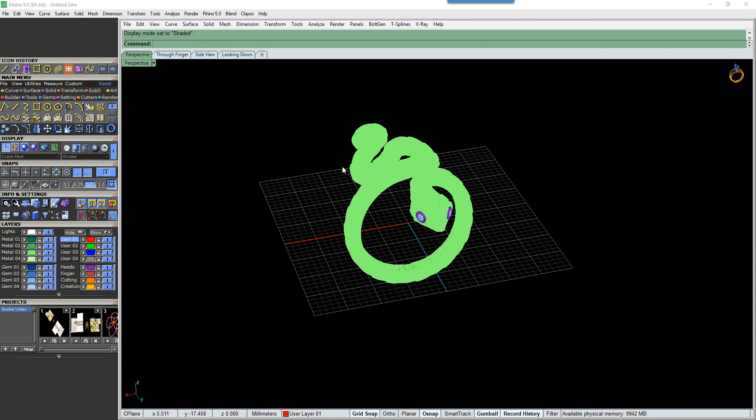Let's just get it shaded and save you out. Let's get rid of this. Let's just bring out this save that I've done. So all I've done is a picture frame, so middle mouse button, picture frame, and then go and find a picture.

Let's go pictures, let's bring in a B for instance, and I just do it on the white layer. Click, shift, pull, and that brings in a picture of a bumblebee. It must be a big picture. Wow, yeah, that's a future project which I might do a video on in the near future, just to do a bumblebee.

So these are all my reference images, more for inspiration and actual copying. So we're going to do something similar to this or this. The mouth, we're not going to bother having that wide open, although that would be quite cool, holding a stone maybe.

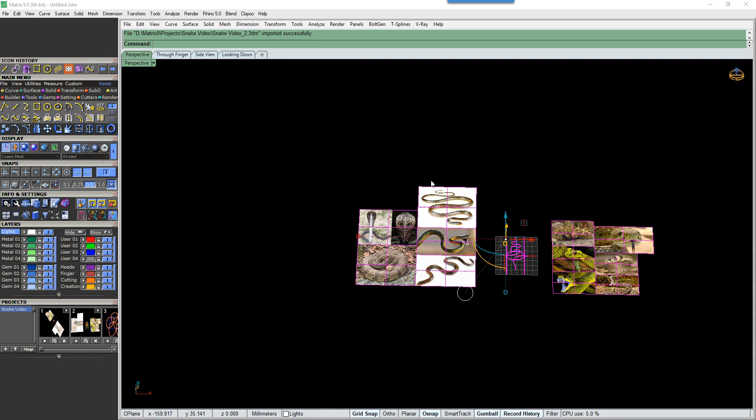So I've got my ring rail out. Let's just delete this a sec and bring this out. So to explain, what I've done is I've got my ring rail, which is size M, 7 in American size. I've put these reference guides in. Sometimes what I do is also put a reference guide in for the depth of the shank. So in this case...

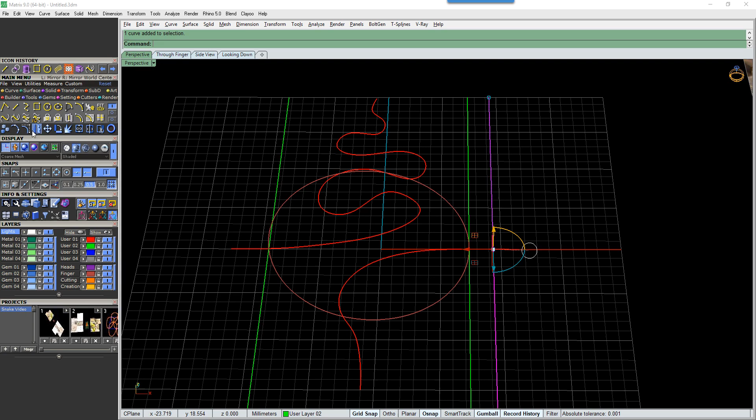-2, and we'll mirror that to the other side. And why did we not mirror? Let's do that again. Looks like my ring rail is not quite in the center. So let's get rid of you guys.

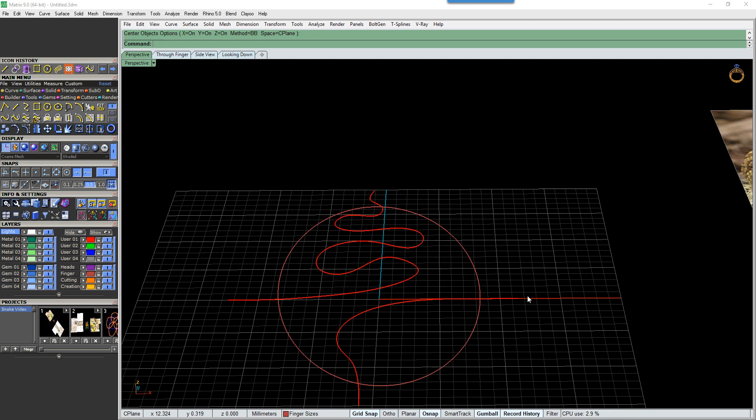Control Alt C, that puts that in the center. Looking down on shaded, I'm going to do an Alt arrow, which is a nudge feature. So that brings that in alignment.

So let's turn on quad, and we'll change to green, and we'll pick up quad snap with both sides. Click, and we'll do Alt click 2. I don't really want to go beyond this outer curve, so sometimes what I'll do is I'll put those on red. Let's put you two on blue.

Now the curvature is not quite right here, it's not as nice as that one. It's a bit ugly, but we'll worry about that in a moment. We need to flow these curves up to here. And what I would do...

Most of the time is this one, Custom Rail Advanced. I'll just show you the difference. So if I click that, click my two curves and press enter, that puts in a ring rail in its entirety, going all the way around and up and over here. But for this instance, I'm not going to do it that way.

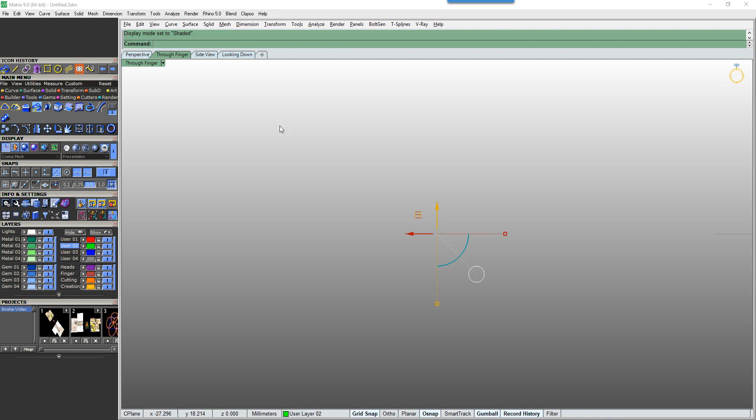So let's see what that looks like. Side view, shaded, through finger, irritating. Curve, offset, 2mm, colour there.

So let's do this again. Tools, custom rail advanced, click, click, enter, enter, and then it says outside, click the outside ring rail, and now it will do an inside and outside ring rail, which can be very helpful.

And we'll make you grey as well. And then we'll try the second method, which is the most common, which is curve from two views. So curve from two views, this one, false, enter. This one, false, enter.

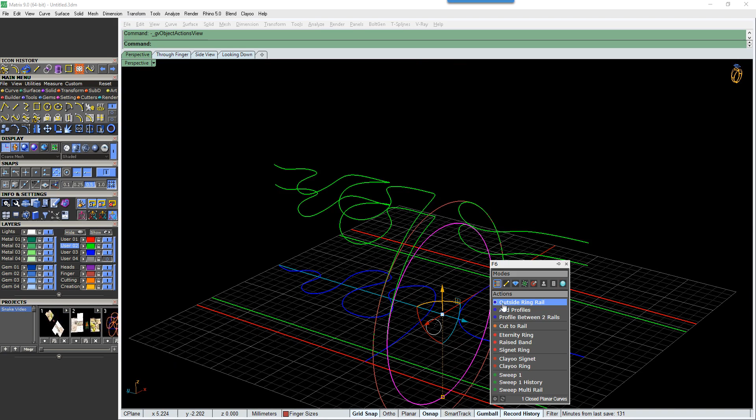So let's click the inside ring rail and add a profile to this. And the profile I'm going for is this one here, which has a definite point here. It does have a point here, which is a bit irritating.

I think it was Michele of the distributor for Gemvision in Italy, who's been in my classroom once or twice. Refused to drink my coffee, but hey ho, he's Italian.

English coffee sucks compared to Italian coffee, but I digress.

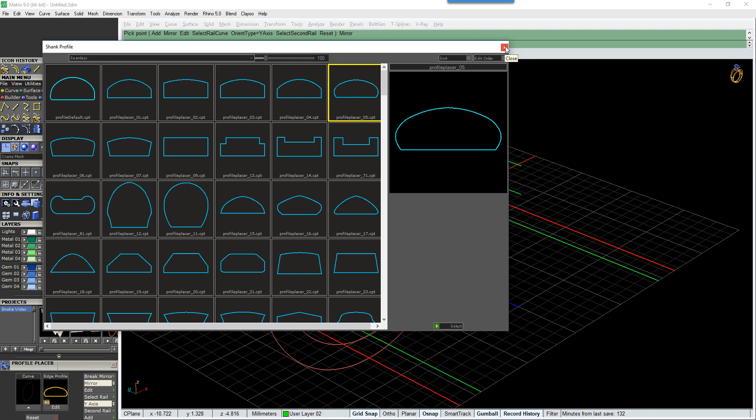What I was going to say is he rebuilt all the profiles in the library and saved them all back up, because some of them are pretty crap, let's face it. But I'm a bit lazy, I can't be bothered doing that.

Now, because I added that to the ring rail here, I'm going to have to go back on myself, select rail curve, keep location, yes, and click this. Select second curve, select the second curve, which is this. Now need to add one.

And I'm going to bring that over. Actually, I'm not going to add one. Let's just press enter on that, click that and delete it. I'm going to click this one, MSR, because this is the tail.

And I'm going to decrease that, but notice both are moving at the same time. Don't want that, so we need to do a mirror break. So, a mirror break. Now when I change this one, the other one doesn't move.

So we'll take that down to 150, and I want to take it in this direction, down 150. So select rail curve, keep location, yes. Click this, and that'll give me the option to reduce that down, do it about 140.

So let's just have a look at how this sweeps. If we click one rail and do sweep one history, click here and here, make sure we're on a metal layer and press enter.

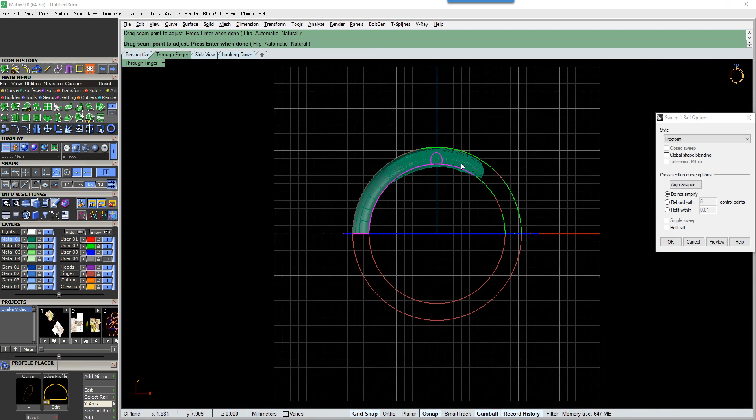Let's have a look at this in the through finger. So we've got a bit of ingress into the finger rail. Most of the times I would sort that out by doing Roadlike Through Finger preview, but it doesn't like it. Global shape blending still doesn't like it.

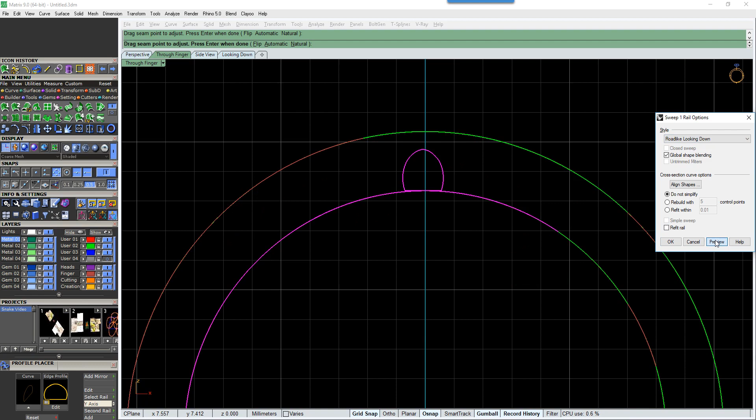So road like inside view, does that make any difference? No, it's still toffee. Road like looking down, no, doesn't like that either. So we'll go back to freeform preview and see what we get.

Now the way to correct that would be to add more profiles and see if that corrects the issue. So I'm going to click cancel on that.

And now we're going to try inside outside, sweep 2 history. Profiles are going this direction. Press enter. Doesn't like that.

I can't really be bothered working it out. I'm pretty sure it's the closed curve seam on one of these. Closed curve seam is this little beam here. Let's just try that. Yeah, it's the closed curve seam, but I really don't like the surface.

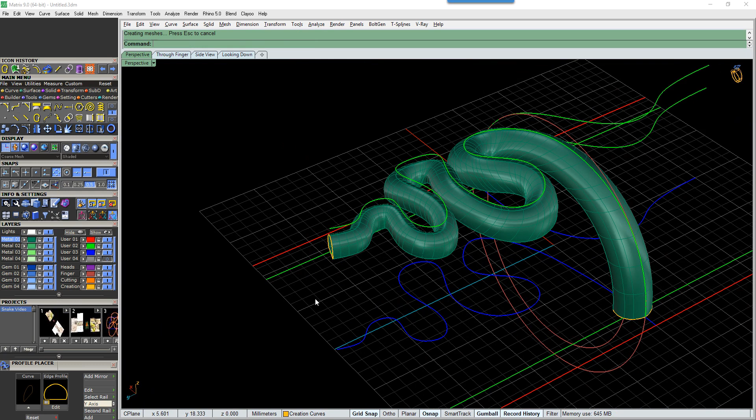And it's the point count between the top and bottom rails doesn't match. There's an abnormality there. So let's click the inside and the outside.

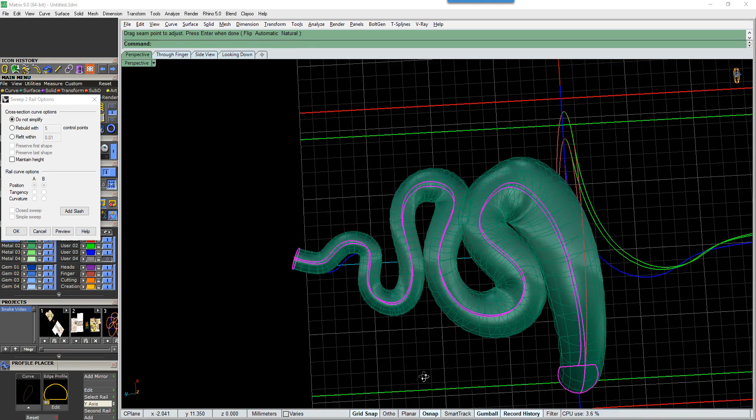F6 that again, and we'll do sweep 2, which is the Rhino sweep. Make sure you've got this record history on, God knows why you'd have it off. And that's not looking too good.

Maintain height through finger, does this make any difference? Yes, it does, but it's still looking pretty pants.

So out of all the ways of doing this, I'd probably go with the first one. Let's just try a rebuild on these ring rails. So rebuild, it's saying 32. Let's try with 32. It's a little bit neater, not quite where I want it.

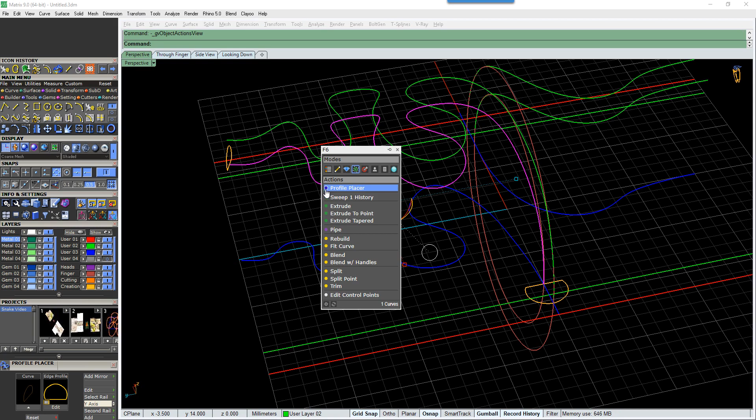So let's delete that. Let's just go into single ring rail, F6, and we're going to go with surface sweep 1, profile, profile, enter. Yep, and that seems to be the neatest.

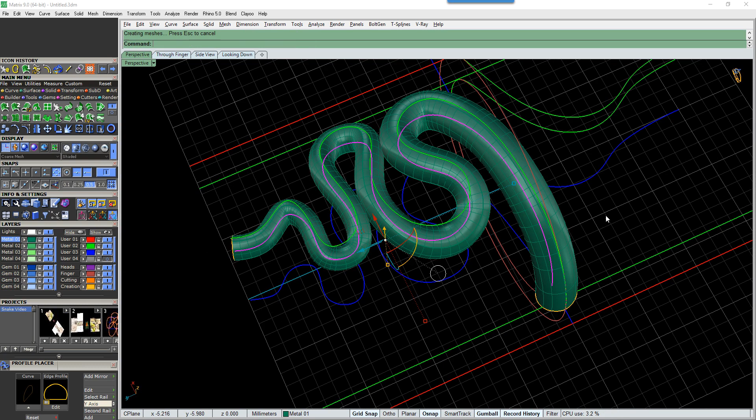Let's go back to that. So let's just turn that colour layer off. I'm going to do the 2 rails sweep again, just to show something which I forgot about, which is add slash. I'm going to turn on perpendicular, add slash, and we're going to go from there to there.

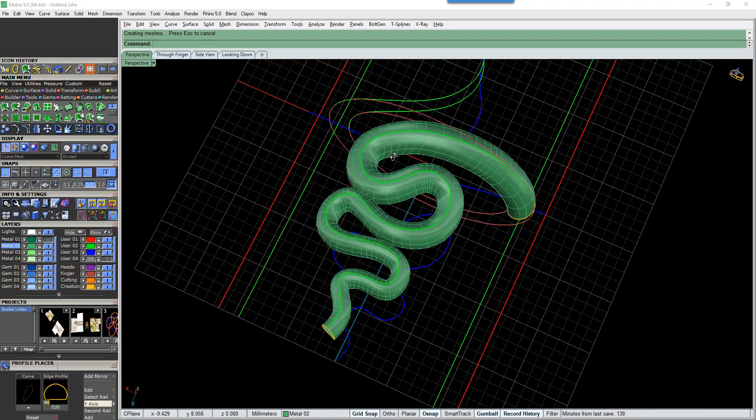And what that does is it straightens up the sweep, so to speak. Just make sure that we get this right. Let's click OK and then have a look at that. See, that's sorted that kink out.

You don't really need this inside outside ring rail in this instance. I just wanted to show you that add slash. You might want to rewind that and have another look at that. So this outside one I'm not going to bother with. These greys, we're going to get rid of you. So we're going to go with the sweep 1.

Which has that right, the snout as such. Let's go to shaded.

You could just do this, which I really don't like, but in this case it works really, really well. I just wanted to show you some other ways of doing it. So let's just get rid of you, and just turn off yellow a moment.

Utilities, show edge on this. So this shows me the points. There's always a closed curve seam there, and there's a right angle here.

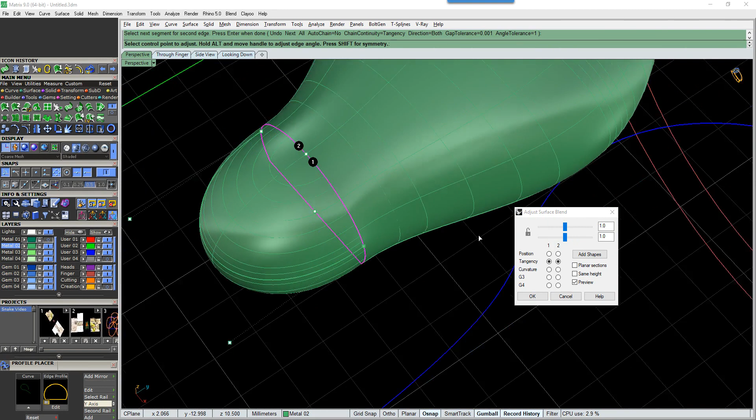and go from here to here, enter, and then get a lot more pleasant result. But in this case I don't want a snake with such a long snout, so we'll just take that back a little bit.

And have a look at curvature and see if that gives a nicer result. Not quite sure which one I prefer, probably tangency. Click OK and then have a look at that.

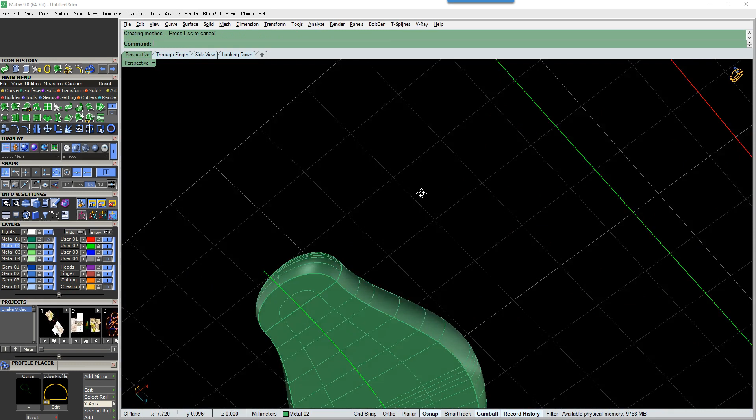So let's just turn it to that colour and hide it. That was the back end, wasn't it? Turn this back on, and we'll do profile cap.

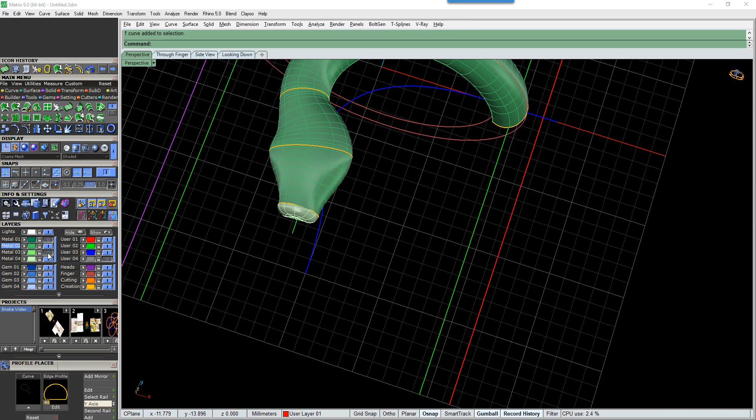And make that colour, and then we can flick between the two and see which one you like the look of. Let's change the colour of that to its body and flick over to machine.

And what I'm looking for is any kind of undulations. Let's turn you on. Let's get rid of you a moment. Let's change the colour of that to that.

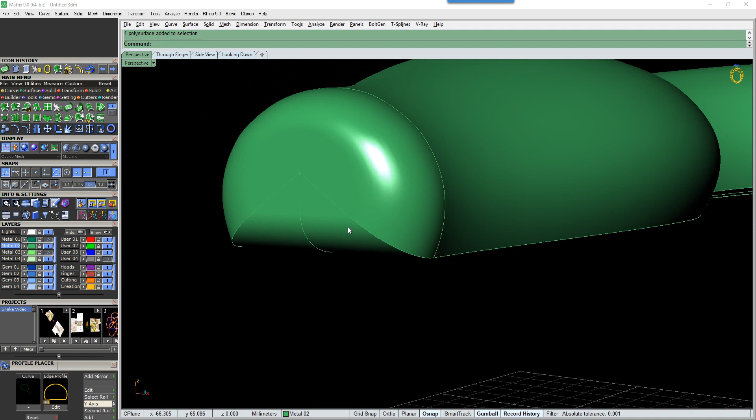Yeah, this doesn't look great. This is the thing about profile cap which I don't like. So I'm going to get rid of that. Go back to this.

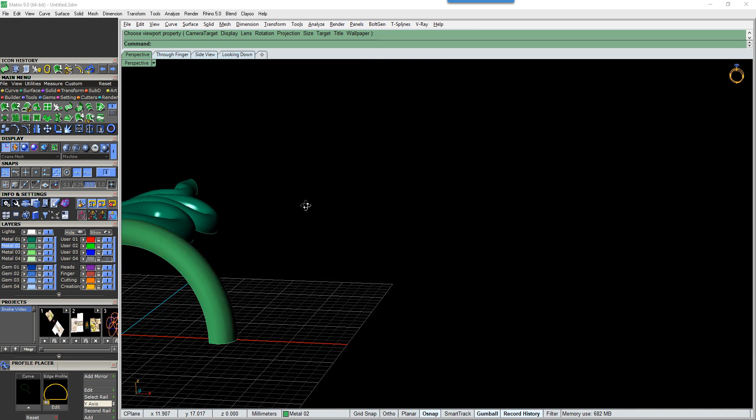And we'll go with that F5 just to recenter my pivot, because the pivot was out. You ever get that when you're going like this and like, dude, I want it in the middle. F5 recenters, F3 maximizes the view to the given object that you've got selected. So F5, F3 I use a lot. I should hotkey into my mouse, but never got around to it like most things in life.

What's grey a sec? No, grey was all of this. I normally have them on white, so I can turn them on and off as I need them. Let's go back to shaded, so we've got all our points back.

And we'll do the tail the same way. So F3. So let's have a look at that. Utilities, split edge. So we split that edge there. So when I go to surface, I'm going to blend surface.

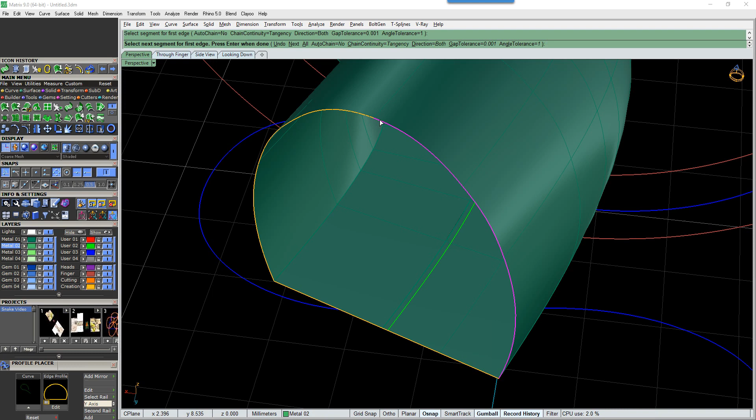So this end I would probably want that a little bit longer. I should have locked those. Something like that. That works. Let's just delete that.

I just remembered another method, which is loft. So I'm going to click this side, enter. Oops, let's try that again. Loft, loft, match tangency, preview.

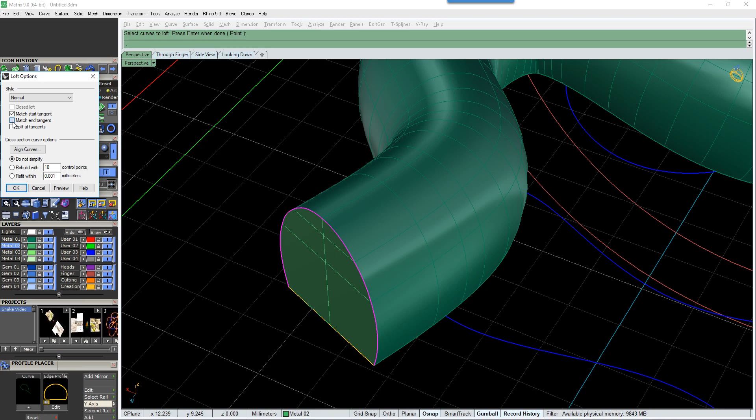You've got no control over that, but it does give a very nice result, but it's a bit more laborious because I've got to patch that off. So we'll stick with the one that we did, which is blend surface.

Could go really hardcore and go for this one, which is curve network, but it's not necessary. It really isn't. I'll show you what that would look like. Don't deal with curve network a huge amount,

because everything I do is money orientated now. I've got to get everything done as quickly as possible. Not that I do.

So let's have a look at how this would look. So if we split this with that, enter, and if we split this rail curve point there and there, blended surface, curve network, and I'm going to click there, there, and there, preview.

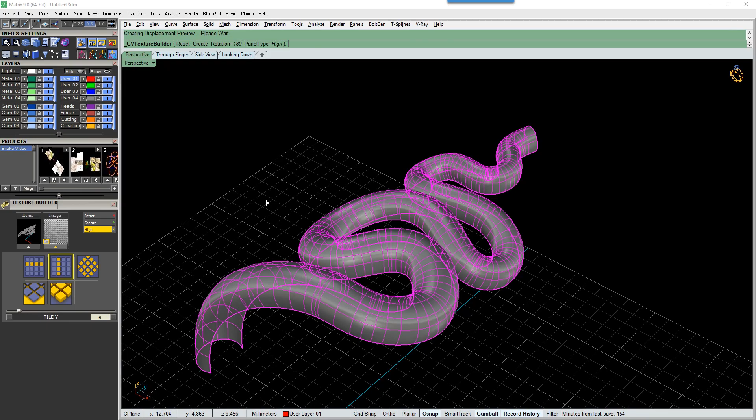Oh, there is snake, I didn't see that earlier. Let's use snake, it's kind of obvious. Now the first results are pretty poor on low, so just crank it up to high immediately, and then have a look at the direction of the scales.

Now in my head that's going the wrong way, so we'll go here and change this to 0. Now the scales are going in the correct direction. So this is one way of doing it. When I press enter, I've now got, let's just go to plastic. I've now got the scales, but it's a bit rough. I don't really like it.

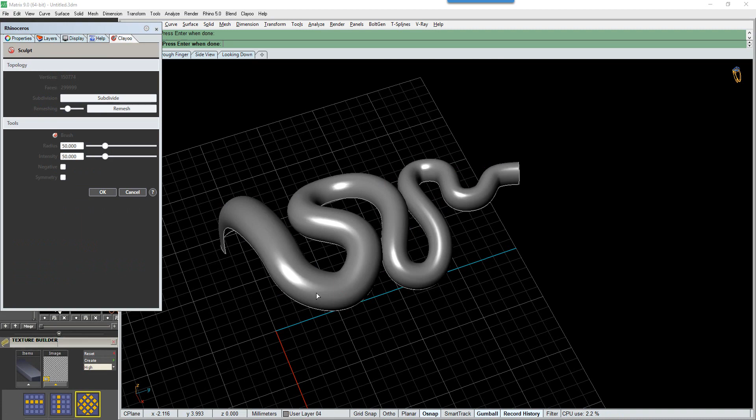I could take it into Clayoo. So go back to Art, Sculpt this, just wait a sec while it works it out, and then what I can do is smooth this. So if we just smooth that, Control Z, intensity, reduce that right down, and then just go over the top, and this will tidy up.

This is the kind of thing that I do in ZBrush. I'm not going to say ZBrush to all you Brits because it sounds stupid. Get over it, get over yourself. ZBrush, ZBrush sounds stupid, it sounds like Z-Cars. Actually that works, Z-Cars sounds stupid now. Now I'm showing my age and I'll shut up.

So if you wanted to create more definition, you can use the brush on a very small radius. Maybe not that small. And use negative. That's not really working, so let's try this one, which is crease now.

Pinch, what's this one? Inflate, no. Crease, is there a knife? Is that pull? Let's drag. Let's try pinch. Turn that off.

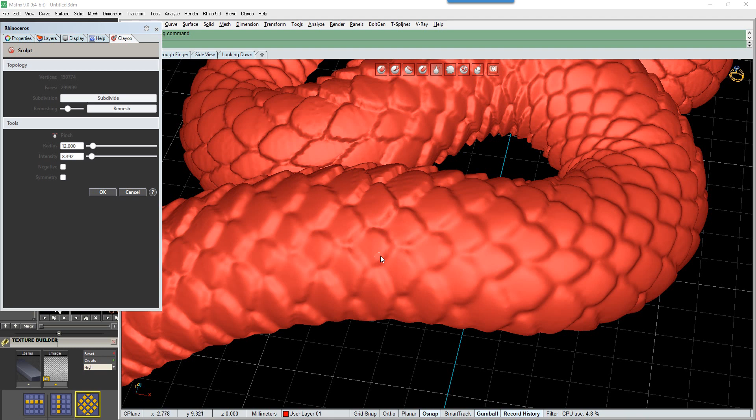As you can imagine I would be there all day doing that. Let's just whack up the intensity just to show you what I'm up to. Let's increase the radius of that. Welcome to my world, this is the kind of stuff that I do all day long with my ZBrush projects.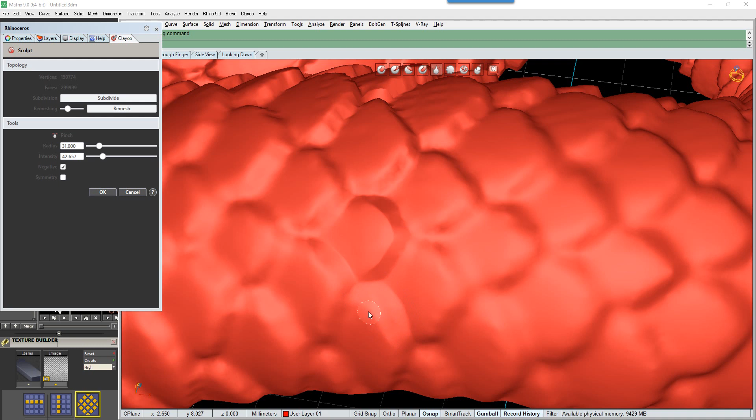I just wanted to show you the power of Clayoo's sculpting tools. If you just want to have a dabble, it's a good segue into the whole sculpting side of stuff. I normally use my graphics tablet, this kind of thing. That gives more definition to the scales. Click OK, delete original object, yes. And that's one way of doing it.

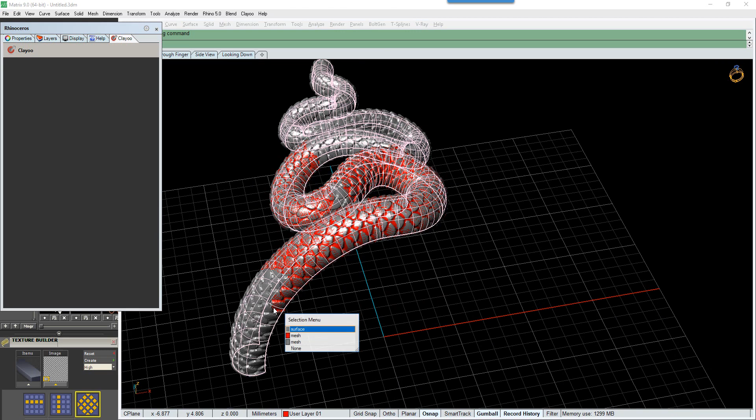Now that doesn't look too bad, but let's show you another method. We go to transform, we've got smart pattern. So let's put this in here. Objects, oops. Browser, and there's nothing in here that is snake-like.

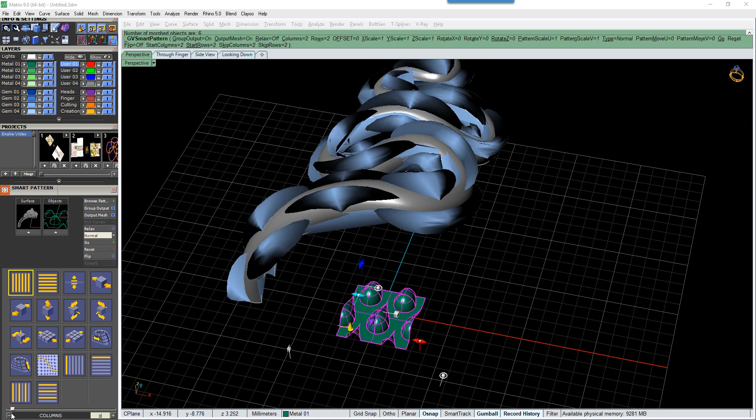I think this is as close as I get. Import, put that in the objects box. Quite tricky to control and quite tricky to see. So let's take this up to 5, let's take this one up to 6. It's not looking too good.

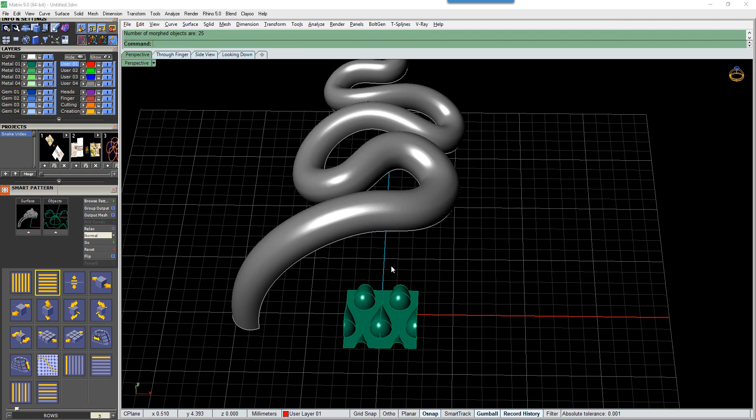Let's flip it. No, it's really not working, just delete that a moment. Let's see if there's anything else in this browser, just so I can show you what this looks like. Let's just flip that out.

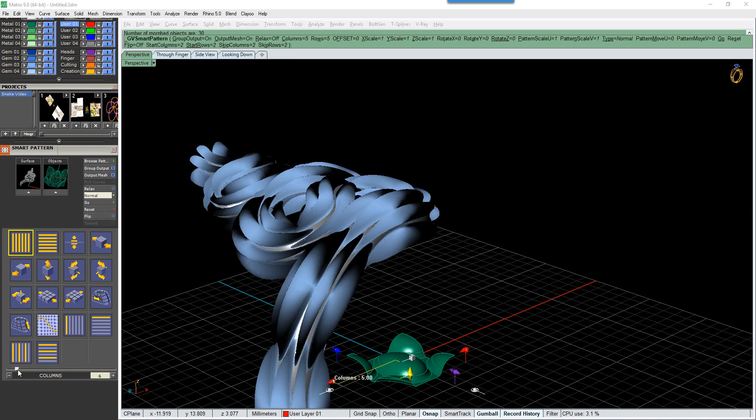Reduce those columns down to 5. Actually no, I was going the wrong way. Let's look at that one. Not looking too hot, is it? Let's just change the scale of that one to 0.5.

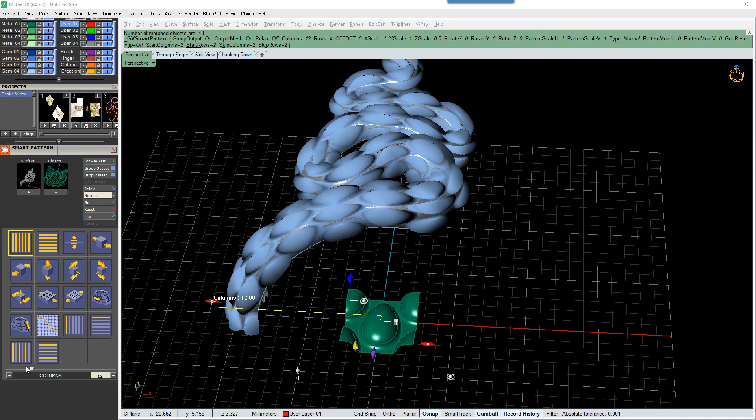No, it's not rows, one of those things you always get hold of the wrong one. Increase the columns, and all of a sudden it will come. It becomes clear that the snake looks like it's got horrendous acne, so that's not working.

So what I did, let's just hide you out, get rid of you, bring out these curves. So what I did is I created these shapes. So let's grab hold of all of these. I didn't spend a great deal of time drawing these, so you could spend a bit more time creating this.

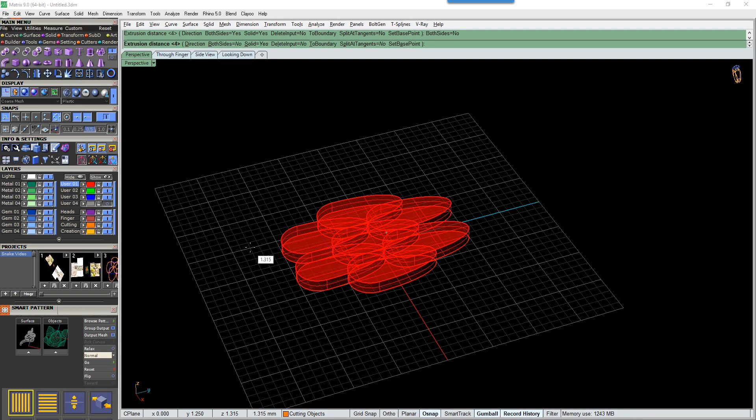Solids, extrude, both sides no. And I'm going to take that to about 1 mil. Turn on my snaps, so I've got 1 mil. Let's grab you and move you 5 degrees.

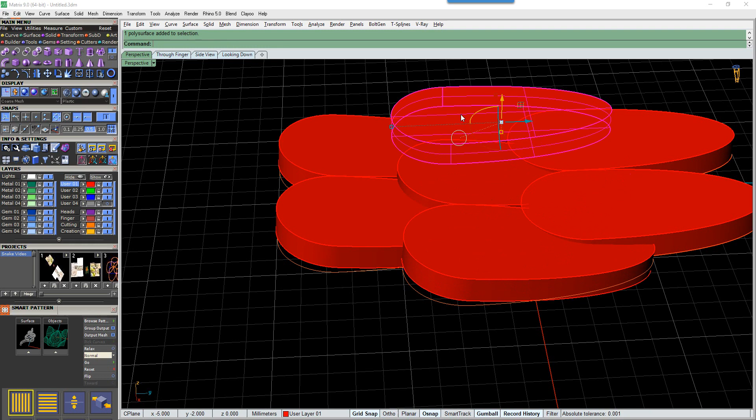To get a kind of step. Oops. Going on. Grab this one, let's move that one like that. Let's have a look at this in the looking down viewport in shaded. Go to ghosted, grab.

Turn on wire cut, which is one of my favourite tools. Click this curve, which is just a box, and I'm going to do a wire cut. Direction normal to curve, delete input, no, both sides, yes, keep all, yes, enter.

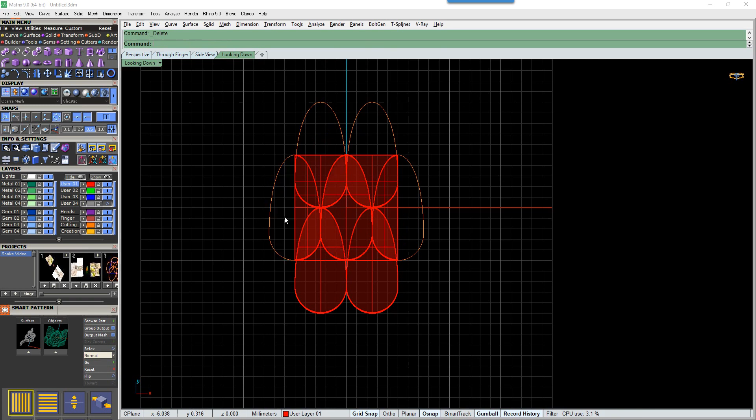That'll do the boolean. So have a look at this through finger. I need to tidy this up, so I'm just going to draw a line here to here. Wire cut, click - so this is my line, these are my objects, press enter, and that chops off the bottom to tidy this up.

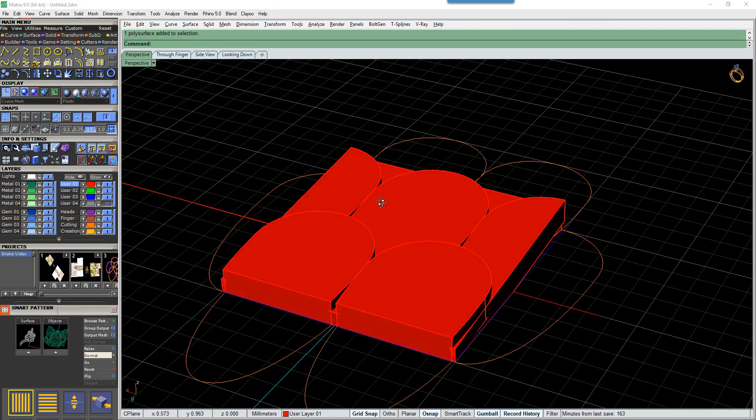So these are going to be my scales. Hopefully this should work. Let's have a look at this in the through finger. Everything's within that. We've got a bit of a problem there that might cause us an issue later on. Let's just click that and see.

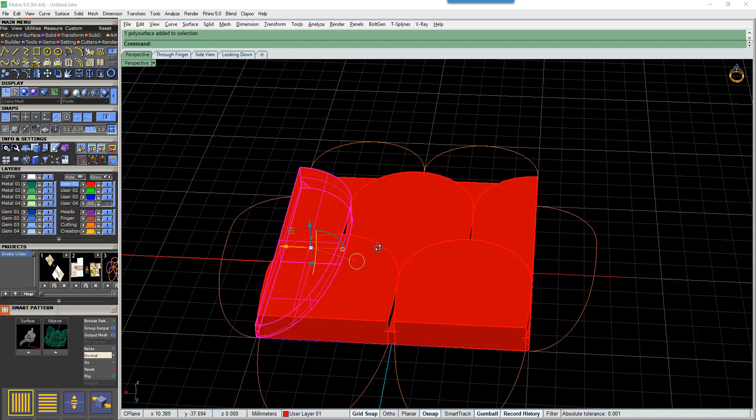You don't know it until you actually flow it. What I'm trying to get at is these sides need to be perfectly straight for this to flow correctly. I'm not going to get too hung up on that, so let's see how this works.

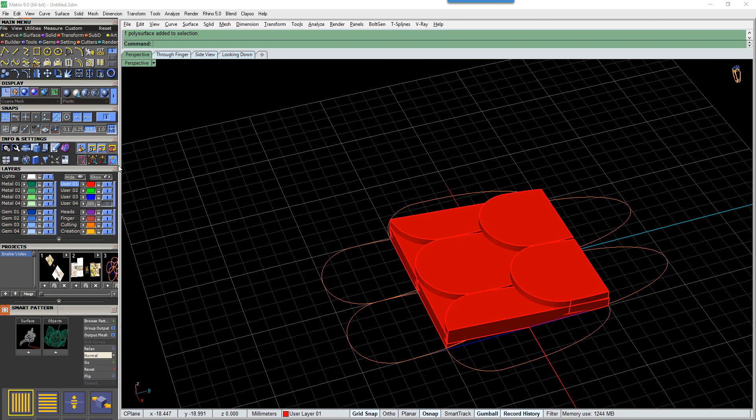Let's turn this back on. I'm going to grab all this. Let's see if I can boolean that all in one go. No, it failed. Surprise, surprise. Alright, we'll just leave it as is.

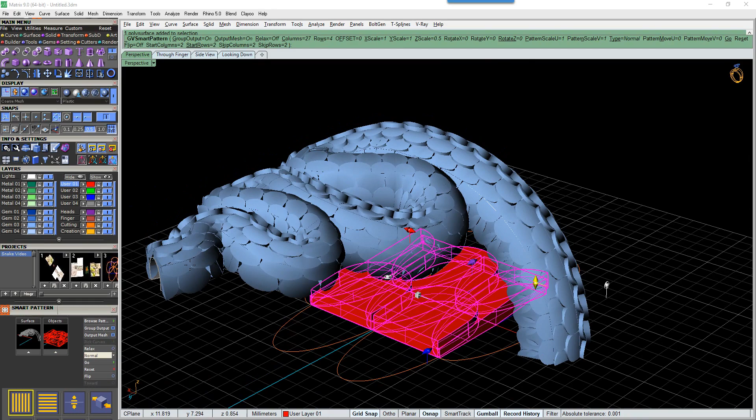So let's right click red and put it in this box and see how that works. Right, so the scales are pointing in the wrong direction. I want that raised bit going down the tail. So we've got some rotation issues.

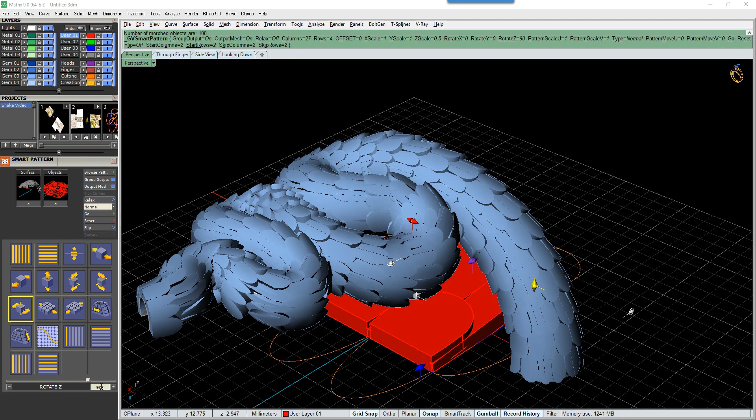So let's go to this and we'll move that 90 degrees. Nope. Let's change that to 180.

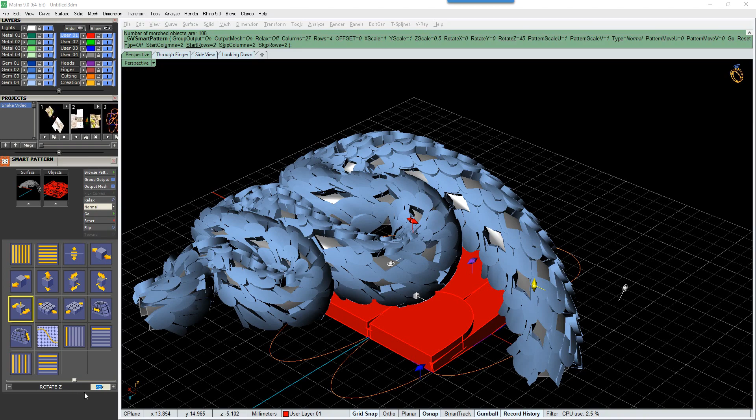So at this point you're probably shouting at the screen. Wow. Go back to 90. There's some issues there with this pattern not being completely straight.

Moving these by these handles is not good. Let's just reset that.

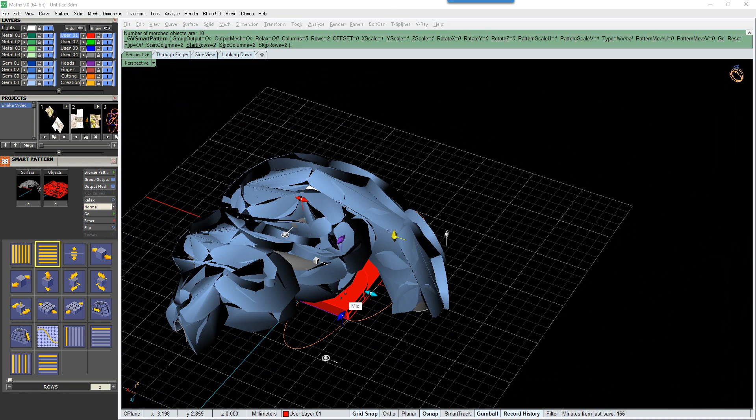Change that up to 5. Let's change you up. Wow, it's going really wrong now. You know when you're almost there and then you just start screwing around with stuff and then go, why did I do that? Why didn't I just leave well alone?

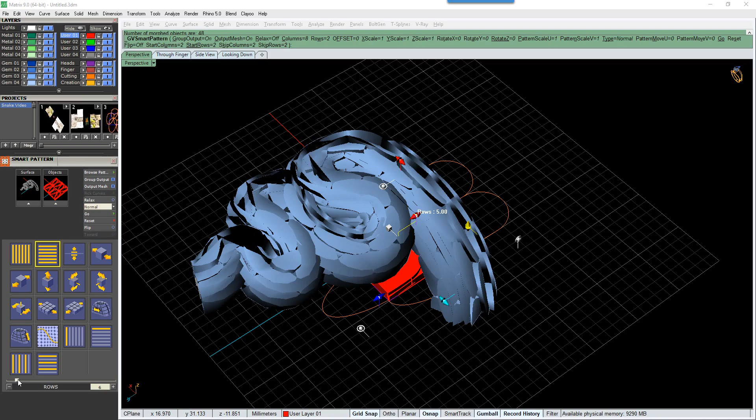Reset. So we'll take this up to 8. Take you up to 5.

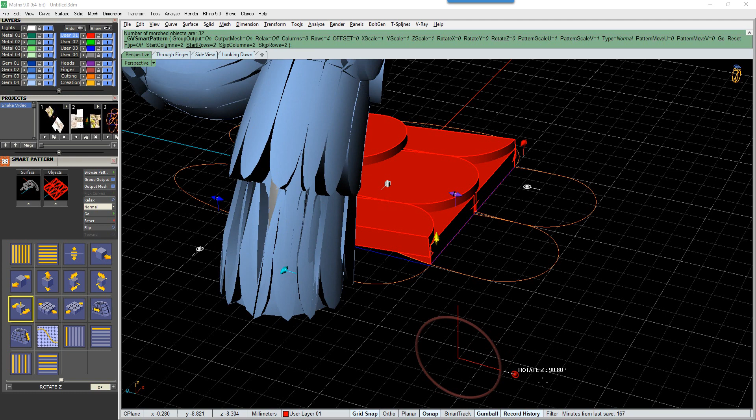So it's the Z rotation that I'm after. I think I established that wasn't right. So let's take it all the way to, so it was minus 90. What a doofus. There, come on.

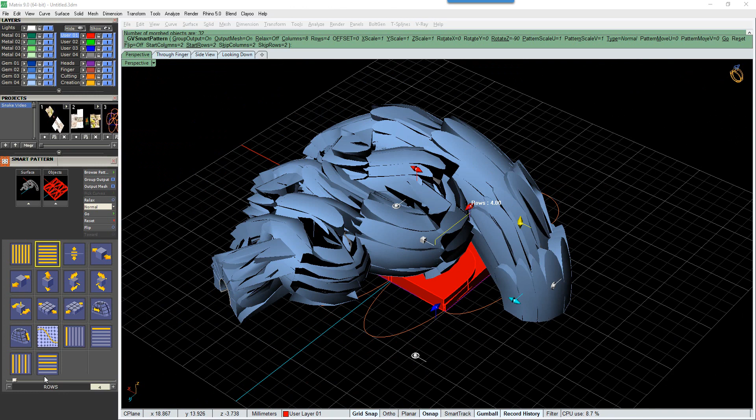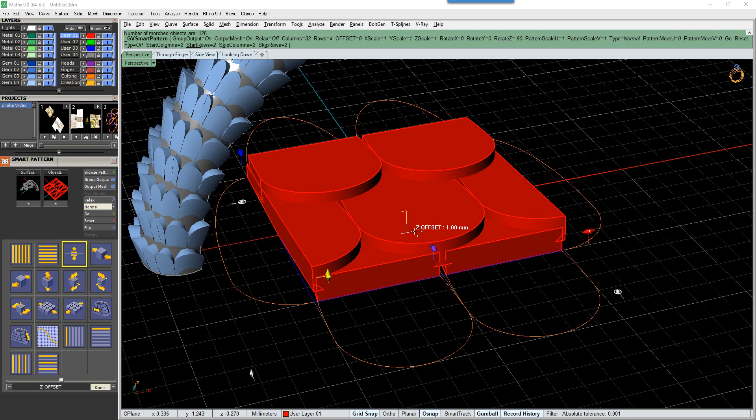Any advice, don't screw around with that handle. Let's increase the rows, all the way up. And then the Z offset, Z offset - put that down to about 1 mil.

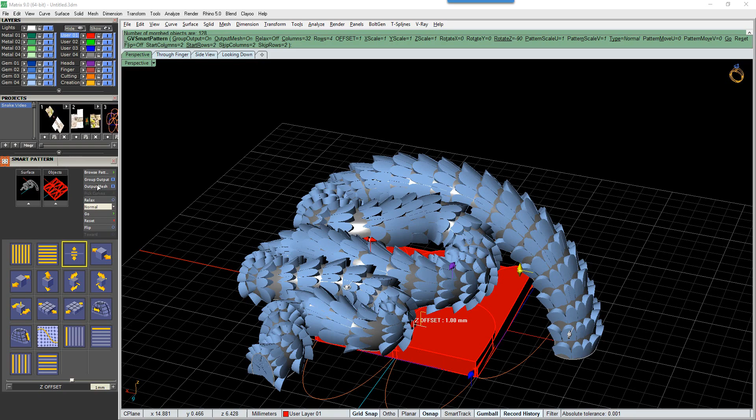And we'll go with that, although I'm not going to go with accent, I think it looks atrocious. I've just pressed enter - group output, yes, output as a mesh, yes. And that's probably struggling to do as I ask. Let's turn off the original surface.

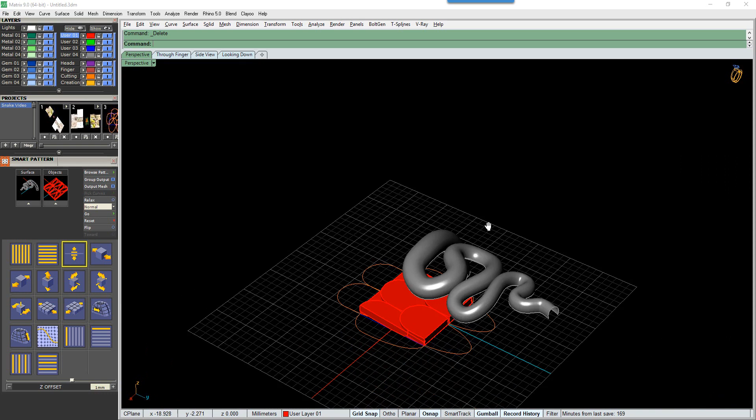So if you play around with this method, you can decide on what the scales look like. It's a lot more laborious. I always have a look at that method, though I think the method needs to be better - you need to spend more time on that. So I think from all that, the best method was that pattern that I'd created.

You could do the smart flow, auto base, and then put your pattern on this, and then it would flow up to this. Not really necessary in this case.

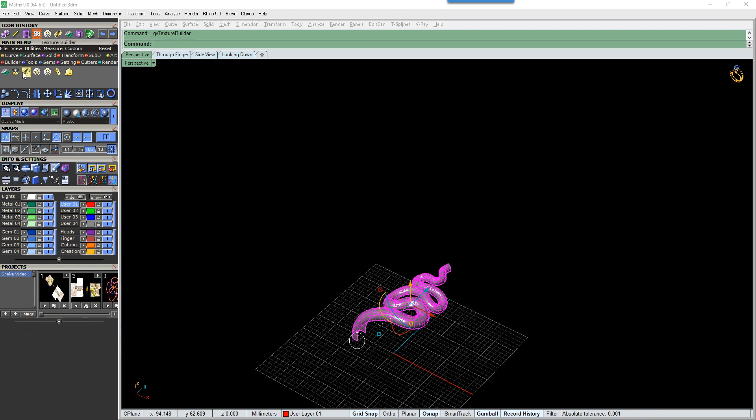So I think the best method was Texture Builder. And high. That looks like it's in the right direction. And we'll click OK. You could go looking for a better image than this.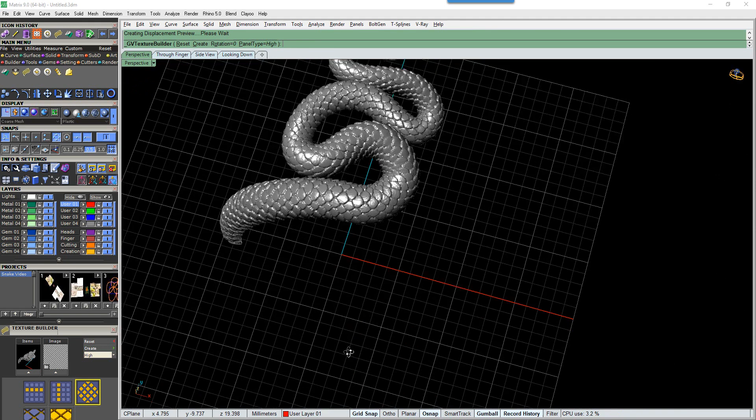You know, it's this noise here that's causing this to look a bit iffy. So we'll click Create. So let's do the same for the front.

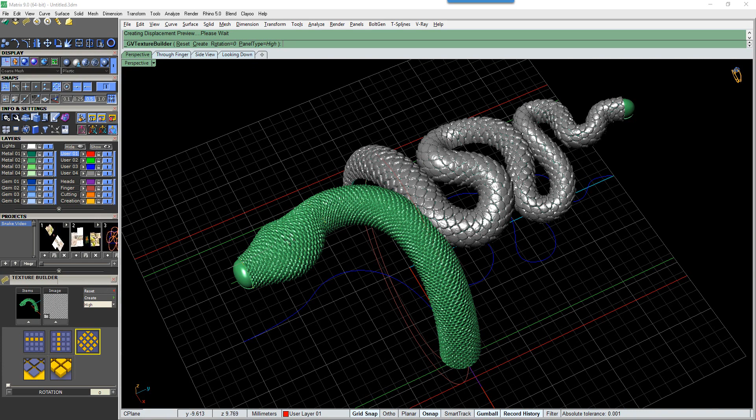Now you would probably want it to stop there. So let me just show you what this is going to look like. Stick that in there, whack that up to high. And just because those parameters worked on that one doesn't necessarily mean it's going to work on this one.

So tiling in the X and Y is 6, so let's reduce that down to 4 and 4. Let's rotate you around 90.

180, sorry. Let's decrease that again. And again. Put that one down to 2 as well. You're just obviously looking for scales that are of a similar size. Let's just take that up to 3.

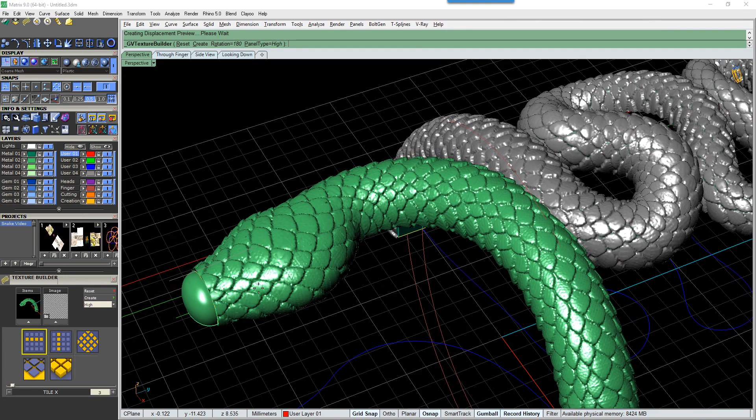I think that works, but the eyes would go here, and the scales on the face of a snake tend to go a lot smoother. Actually, I think we will go with that.

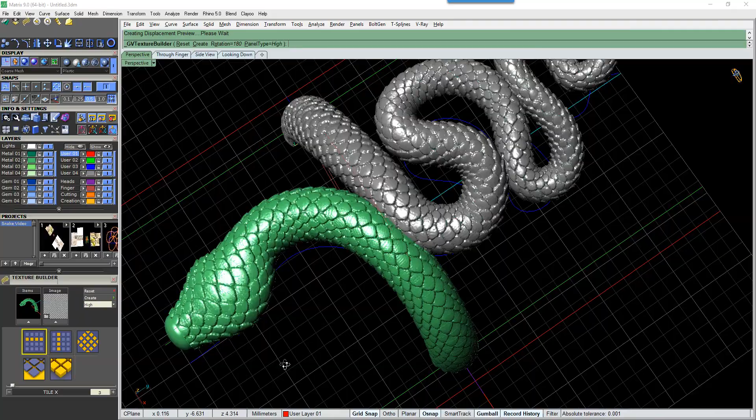I'm just going to show you something else that I would do. Notice that this is wrapping all the way around, and the reason is I didn't extract that surface, and I wouldn't want that like that. So let's flick to grey a moment.

Solids, extract surface, extract here, copy yes, enter. Make sure that's on grey, turn you off, put you in here, whack you up to high, and we'll go with that. Enter. Let's turn you back on.

So let's explode you. And we're going to go with this surface, this mesh, this cap. Go to Tools, and we'll try a mesh fix on that. Delete input object on, enter.

The thing that I haven't done while I'm waiting for this to encode, I didn't do the bottom of the shank, but it would be a similar process. You could do the custom rail advanced and do the whole thing. There's some margin there, so I'm just going to stop here and come back in a second.

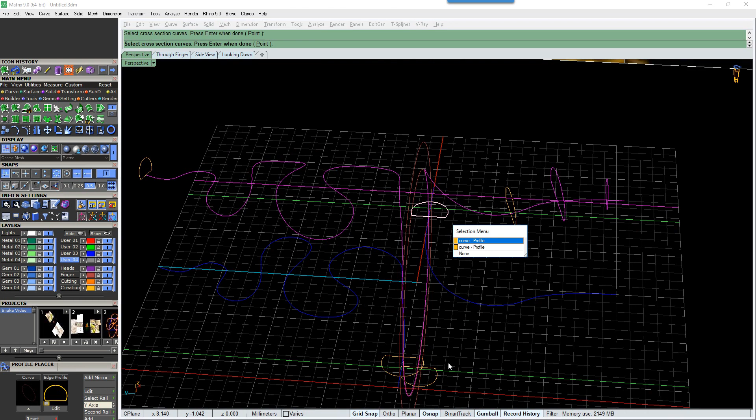I just want to try that again, because something I really like to use when I get a chance to use it in Sweep 1. I'll show you in a sec when I get it back up. Oops.

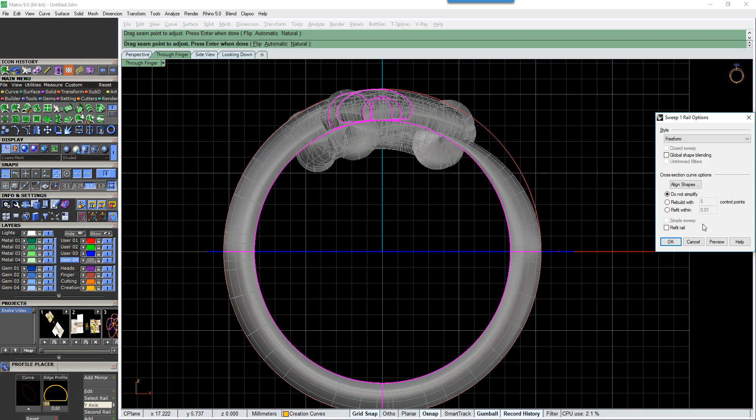So we're going to go with this. We'll flick this to this colour, and we'll extract this surface. Copy. No, because then this is going to be a different colour to the underneath.

Then I'm going to put that snout in. Can you remember how I did that last time? So we need to split this edge at the quad or the mid snap,

and we'll do a blend like that. Decrease that snout back a bit. But this is the surface I'm going to put my scales on.

So that was art, and it is this one, texture builder. Let's put that in there. Let's crank this up to high and just see how this looks. Now I'm doing the whole snake front to back.

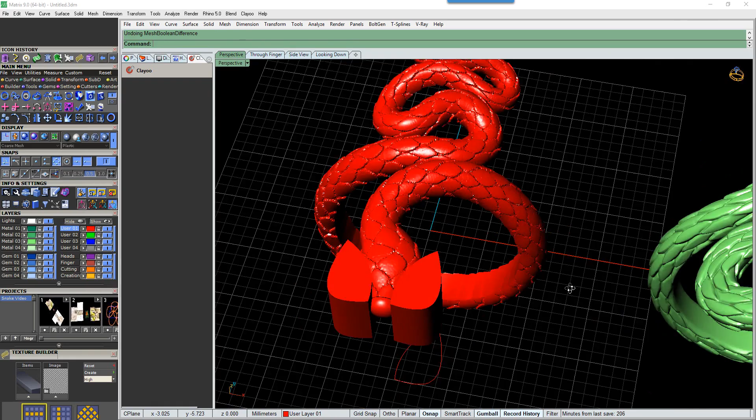So let's do that mesh. Boolean difference of this with this. Enter. Just do it all. No, it's still not working. Maybe I should have done it earlier when it was still NURBS. I probably did that as NURBS and then fixed it.

But what I would do is use that to chop off the sides, which wouldn't be a problem. And then putting the stones in, it was just either do it before it's mesh or do it whilst it's NURBS, and offer them up, and away you go.